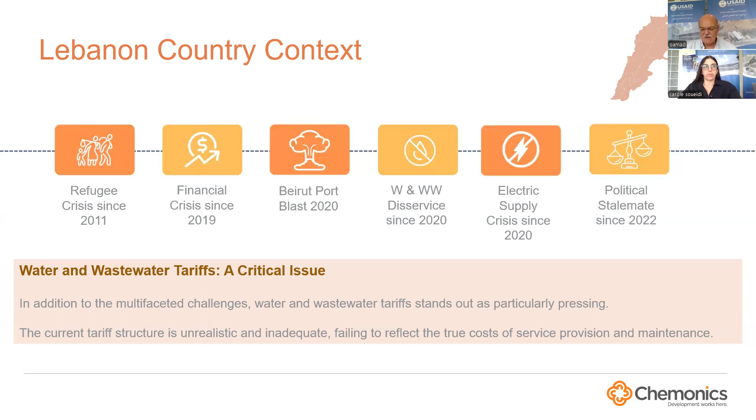So, in particular, the public water and wastewater service, which is our partner, is suffering tremendously, like all the other public agencies, with 95% deterioration and devaluation of the currency. They're unable to provide adequate service for their constituents, and the tariff collection also, of course, suffered tremendously because of the devaluation, with it being collected in local currency. And although they have in the law a mechanism to raise the tariffs every 3 months, they're cognizant of the poverty levels and the financial capabilities of the citizens, so they're not able to keep up with the expenditures.

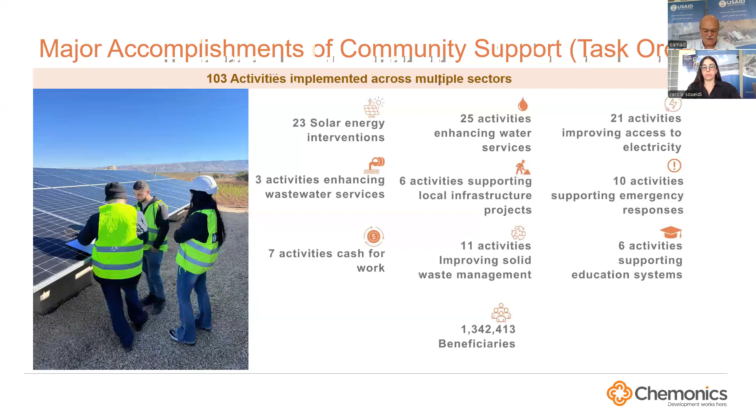So just briefly to go over the components of the community support program, Task Order 2, which is community support, has 103 projects distributed on many aspects of support to communities. And if you add all these that are listed, they're probably 112, but some of them are cross-cutting interventions, including solar energy, water service, improving access to electricity through generators, wastewater service through improving the collection system, infrastructure projects, waste management and recycling, and cash for work, particularly after the Beirut blast, where there was a lot of need to remove rubble and restore destroyed facilities.

So the third component, again, is the capacity building, and it supports all the activities under the IDIQ, Task Order 2, the one we just covered, and all the other ones that we've talked about. And it reached more than 3,000 people, trained them on new equipment, new facilities that were installed, new methods and best practices to do their work.

There is also support to the internships for university students to work within our program, the community support program, and many other USAID implementing partners' projects across Lebanon, and increasing public awareness and holding town hall meetings to introduce new equipment, new support to the communities, and also

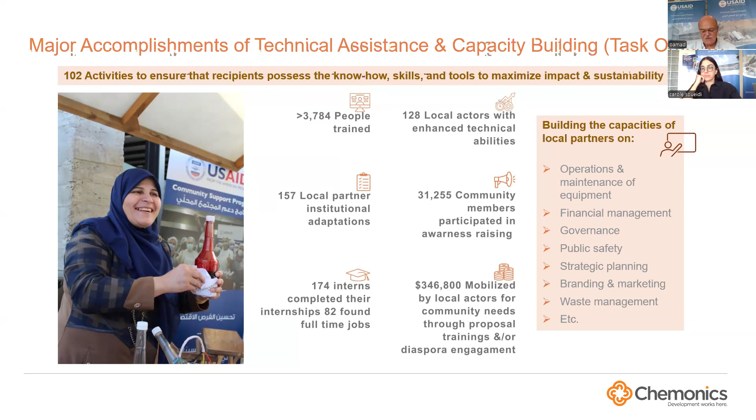developing a diaspora engagement mechanism. The Lebanese diaspora are, through history, spread out throughout the globe, and continue to have strong ties to the country, and eager to support their communities through assistance, financial and in kind. And our program tapped into this aspect and delivered $346,000 through that program.

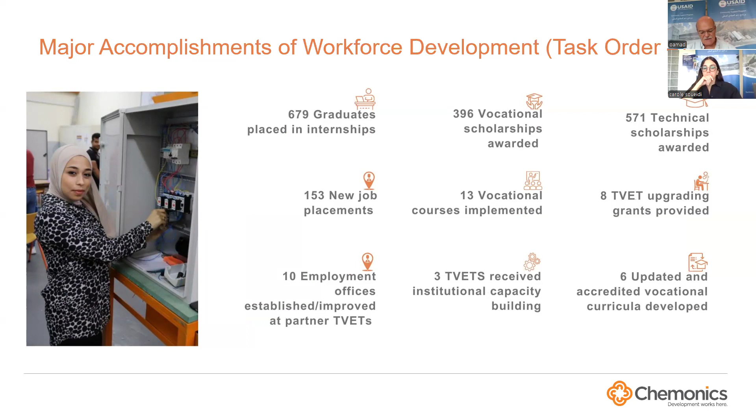And Task Order 4 is the TVET, the technical and vocational training, providing scholarships, developing curricula, improving TVET institutions, and supporting employment of graduates. So that was filling a gap, as I said, in the educational system.

Last but not least is our program, which is Task Order 5. Initially, it was awarded back in 2019, just before the financial crisis. And it was initially to develop 4 wastewater facilities, turn them over to the regional water establishments, our counterparts who would operate and maintain these facilities per their legal mandate, and to treat about 6,000 cubic meters of wastewater per day.

That scope, shortly after award in 2020, was expanded with additional funding to implement 6 facilities and treat 12,000 cubic meters per day, increasing the funding from 15 million to 22 million. However, witnessing the crippling effects of the country context on our partner, the regional water establishment, it was evident that these facilities could not be operated and maintained sustainably after we're done due to the financial crisis.

So through collaboration with USAID, the scope was adjusted in September 2022 to limit the implementation to the 3 already bid and awarded infrastructure projects, while diverting the remainder of the funds towards improving the sustainability and the financial viability of wastewater service to the extent possible, the three in particular that we're implementing, and to expand it to other facilities.

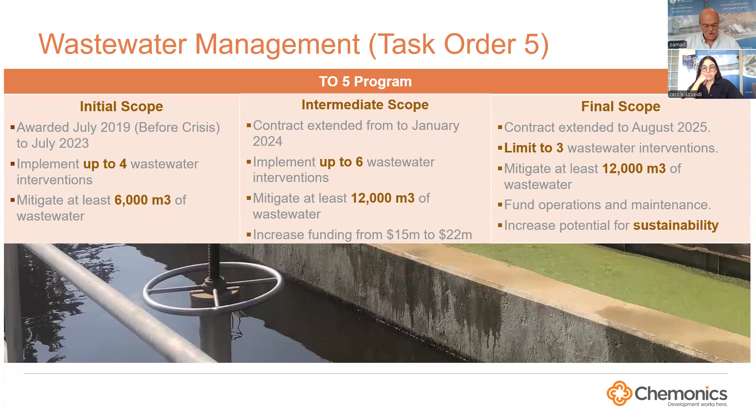So, with that, our team is composed of myself and 3 capable engineers. Ahmad Al-Khazin is the deputy director of the program, and Carole Soueidi, with me, and Mahmoud Farran are engineering managers that manage the construction, operation, and maintenance sustainability of the infrastructure we implement.

In addition to Nusayman Jaim, who's the program coordinator, and she's also tasked with another aspect of the Task Order 5 program, which is incentivizing the private sector to mitigate their industrial wastewater pollution, through providing them with a partial incentive rebate for installing industrial wastewater treatment.

So this is the performance criteria that we have to meet, which we've basically already met as we speak: mitigating 12,000 cubic meters per day, 1 municipal wastewater intervention, we have 3 of them, 1 industrial intervention, 2 of them already installed, as we'll see, and engaged with 7 others under consideration. And to have one of the interventions along the Litani River, which is the main river in Lebanon, and the case study that we'll share with you shortly is actually on the Litani River, that Carole will expand on.

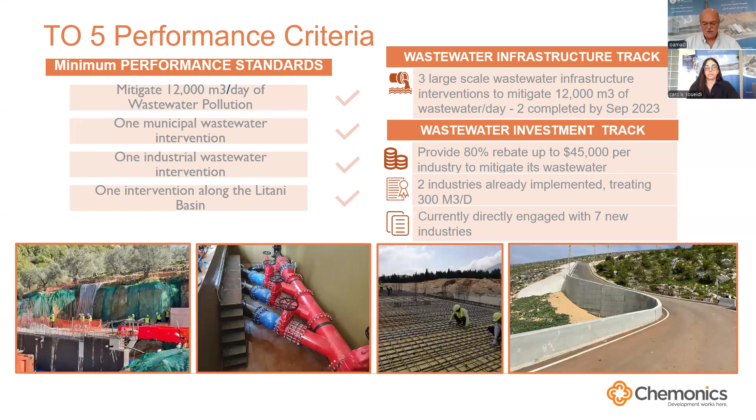And the investment track, we provide an 80% rebate up to $45,000 for any industry that's legal, that's licensed, and that installs wastewater equipment to treat its industrial discharge in compliance with the applicable laws. 2 of them already implemented, while we continue to work with 7 other industries.

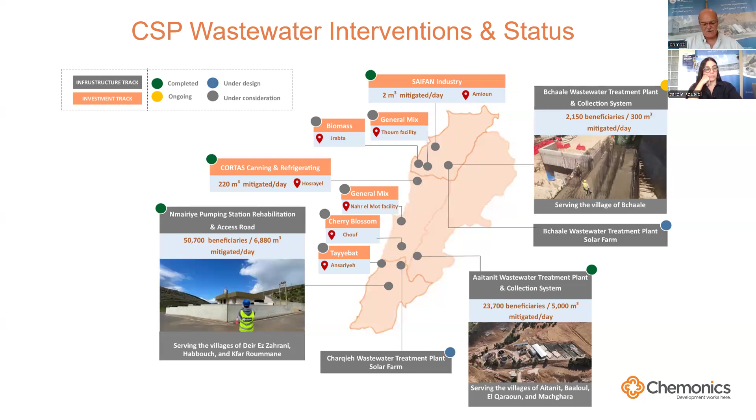With that, I'll turn it to Carole to talk about the Aaitanit wastewater treatment plant intervention in particular, and the implementation of the improvements we did there.

Thank you, Osama. Hi everyone. I'm Carole Soueidi, one of the two engineering managers on the wastewater management task order. I had the opportunity to serve as the project engineer on the Aaitanit wastewater treatment plant intervention.

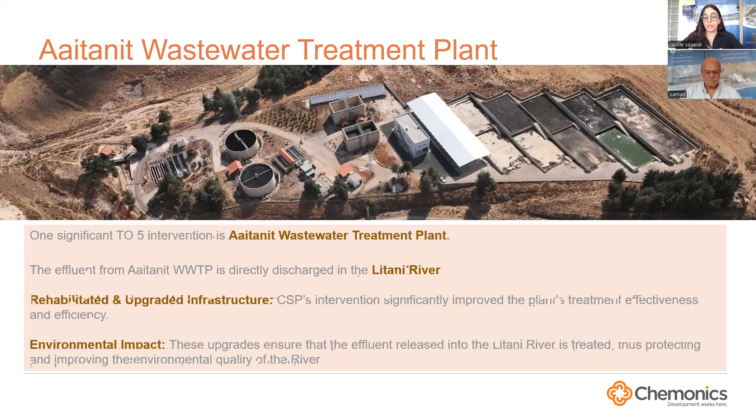To begin, the Aaitanit wastewater treatment plant is one of a handful of approximately 45 treatment plants in Lebanon that remains operational despite the crises and multifaceted challenges faced by the country. This plant plays a crucial role in enhancing environmental conditions for the local community, as it discharges directly into the Litani River. The Litani River is a main river in Lebanon with a major focus on efforts to clean it up due to its use in agriculture.

Why did we select the Aaitanit wastewater treatment plant under our program? It's due to many critical challenges. First, the plant operation was hindered by large accumulation of sludge. This sludge was only dried during summer, limiting the treatment capacity of the plant and causing pollution to the environment along with noxious odors. In addition, the supernatant, rich in ammonia, was overflowing into the Litani River, contributing significantly to its pollution.

Last but not least, many components on the solid and liquid processing line needed repair or replacement. So to tackle all of these issues, we first had to rehabilitate the solid and liquid processing line and upgrade the sludge management in the plant. Addressing these challenges was essential for the plant's efficient operation, and also to prevent pollution and reduce contamination in the Litani River.

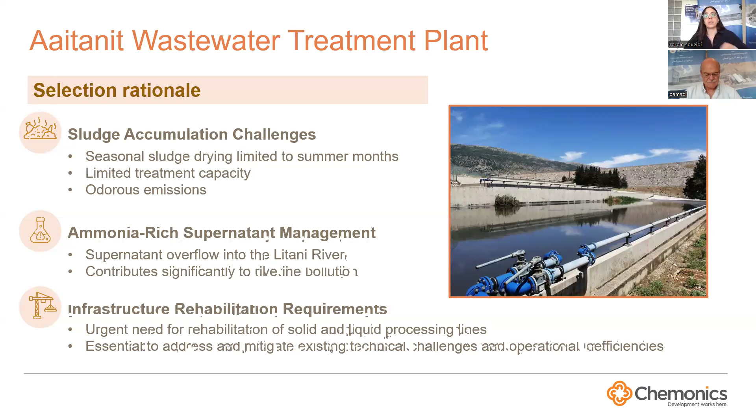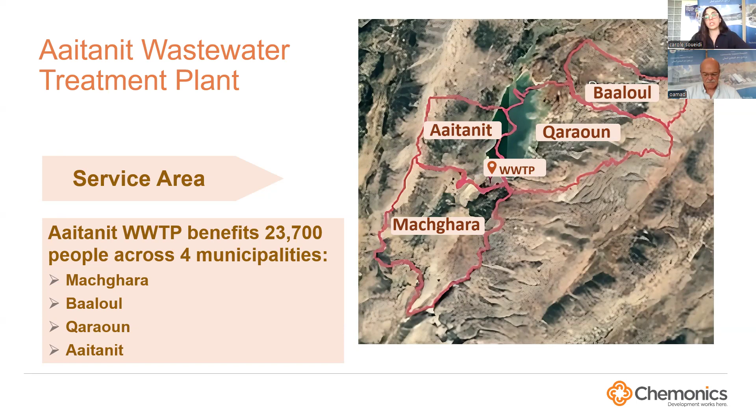As you can see from the map on the right, the wastewater treatment plant in Aaitanit is located directly downstream of the Qaraoun Lake, which is also used in agriculture. The Aaitanit treatment plant treats wastewater benefiting around 23,700 individuals across 4 municipalities: Mashghara, Ba'loul, and Aaitanit. As I mentioned before, this project played a crucial role in significantly reducing environmental pollution, which is essential for public health and ecological balance.

To give an overview of the historical development and key milestones of the project: first, this plant was built through a USAID fund back in 2009 to treat 5,000 cubic meters of wastewater per day. However, the Bekaa Water Establishment was unable to operate it, leading the Qaraoun Union, including the 4 benefited municipalities mentioned in the previous slide, to take over the operation of this plant.

In 2020, due to the deteriorating conditions faced by Lebanon and the lack of resources, this pushed us as CSP to select this project for rehabilitation and upgrade. In 2021, the design was completed, paving the way for construction to take place and be completed in September. We celebrated this key milestone with a ribbon cutting ceremony on September 14, 2023.

CSP also provided full training for the technicians of Bekaa Water Establishment and the union on troubleshooting and equipment repair. It was a comprehensive training, including equipment repair based on industry best practices and the highest safety standards. Currently, in Task Order 5, we are managing the operation and maintenance of this plant under a 1-year operation and maintenance contract, and we are also developing a public-public partnership to ensure the plant's sustainability. This will be discussed in detail later in this presentation.

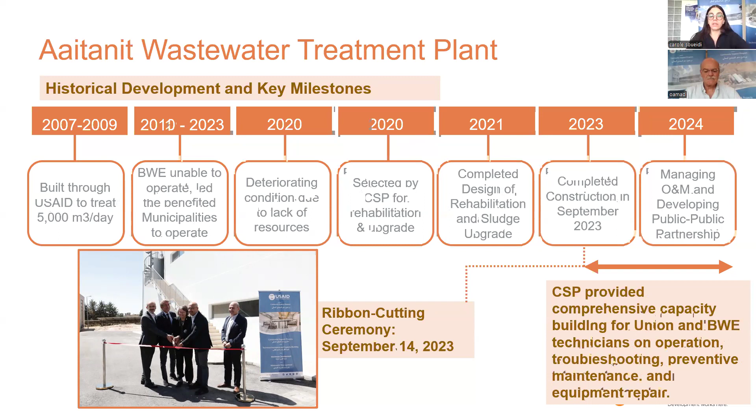So, to give you a brief description of what exactly we did at the plant, first, the USAID fund to rehabilitate and upgrade the sludge in this plant was approximately $1.5 million.

What we did is that we had several interventions at each of the treatment stages. We have repaired pumps at the trickling filter, replaced the pump at the influent station, also in the digesters. We also constructed a 2-story building to house 2 combined units for sludge thickening and dewatering, along with the polymer unit, the sludge tanks, and all the pumps and needed accessories.

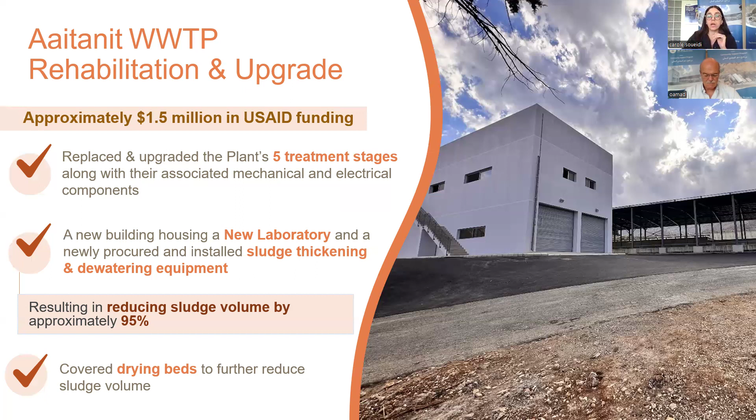We also housed a lab inside of this building so that all tests can be done in-house effectively. We also covered one of the 6 drying beds, and now that we have reduced sludge volume by 95%, all the sludge can fit under 1 drying bed, which we covered with a steel roof to further reduce the sludge volume.

This is a technical overview of the treatment process at the plant, which consists of both primary and secondary treatment. We made significant improvement at each of these stages, as we mentioned before.

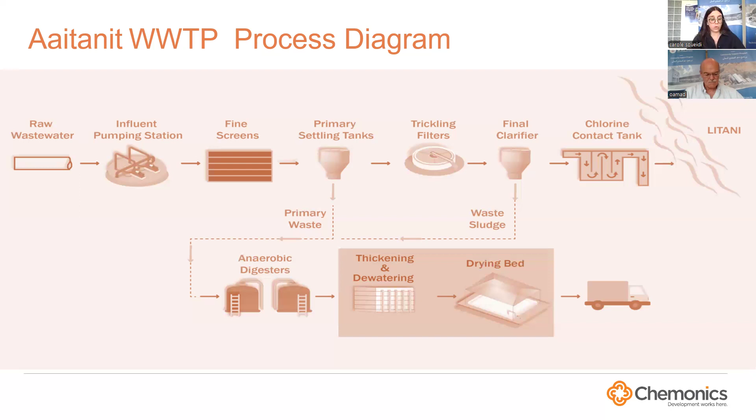The 2 highlighted components down in the sketch emphasize the 2 components that we added to the process. So our intervention here consisted of rehabilitating and repairing the underperforming components and adding the 2 highlighted components to the treatment process.

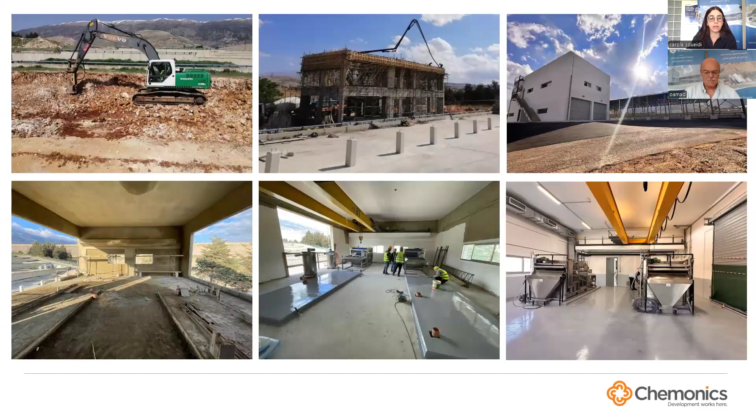We added several pictures here. In the first row, you can see the progress of work from excavation to finishing touches at the plant. In the second row, you can see the installation of the 2 combined units for the dewatering and thickening of the sludge. Here in the first row, you can see the steel structure roof we installed at one of the drying beds, and below, the new procured influent pumps.

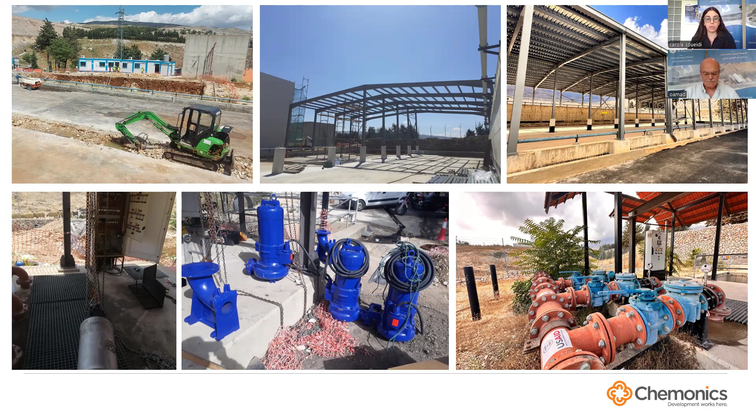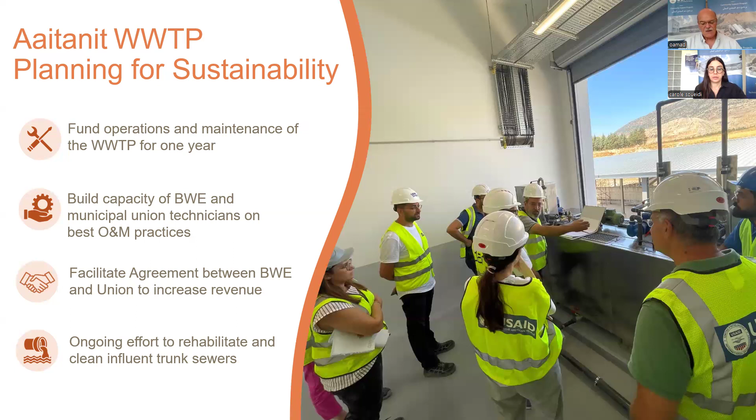So the agreement was - this is the history of operating and maintaining the facility. As we said briefly, it started in 2009 by the benefiting municipalities, and our intervention included the rehabilitation and upgrade and the capacity building of technicians from the Union of benefiting municipalities, and we engaged the water establishment as well with our capacity building. We're currently operating and maintaining the facility on our own and through a private operator.

The operator is mandated with involving and training, providing on-the-job training of the technicians from the Union of Benefiting Municipalities within his staff, to get them trained on best practices for operation and maintenance. And to ensure financial viability, we developed the public-public partnership between the benefiting municipalities and the water establishment, which we'll go over in the next slides.

So the regulations in Lebanon started back in 2000. Initially, before then, there were 21 utilities - small communities in the country, cities, unions of municipalities, of villages - that were created to provide water and wastewater service by their own communities. There were no clear roles and responsibilities, and regulations weren't yet fully developed.

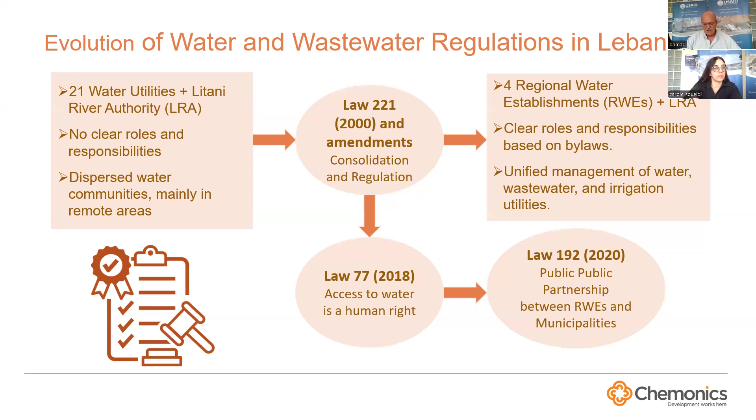The law was amended back in 2020 to allow for public-public partnership, to allow delegating the operation and maintenance of water and wastewater facilities to the local beneficiaries. Our example here is the first being done in the country for wastewater.

So the problem is lack of financial resources to sustain the equipment. This is particularly in light of the very low tariffs that were set even before the financial collapse. It was like $120 per year per hookup or per account, which is hardly enough to operate and maintain all the water and wastewater facilities in that region. And the other problem is the collection rate - it's very low. The hookup rates are also low.

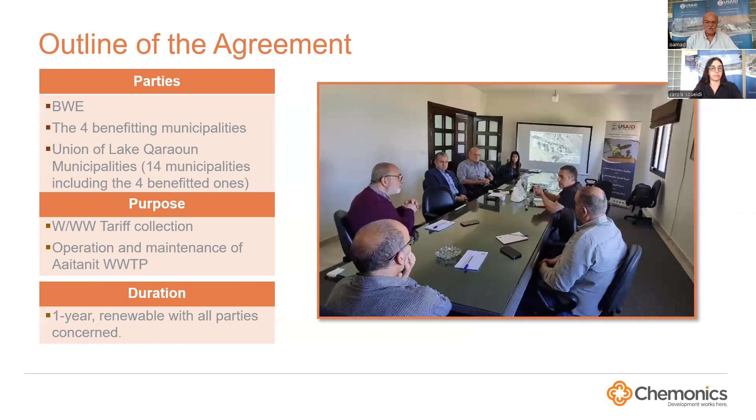The other villages or municipalities don't have financial obligation for this purpose. The purpose is to collect the tariffs from these 4 villages and operate the facilities. The agreement is drafted for 1 year, renewable unless any of the parties wants to stop it. This gives the water establishment the right and the mechanism, once it builds its capacity and financial situation, to take back these duties as the law initially was set for it to do.

So what's the obligation under the agreement for each party? The Bekaa Water Establishment has the duty to set the tariff, and they can adjust these tariffs every 3 months. But realistically, the tariff setting across the country is at the Prime Minister's or Council of Ministers level. The water establishments lobby and request increases, but that decision has to be endorsed at the highest level, primarily because of concern for the ability of citizens to pay under the current financial crisis in the country, and in recognition of their limited financial resources.

Under this agreement, the water establishment will provide the benefiting municipality with a list of their subscribers, and typically these lists are outdated.

They don't keep up with changed ownerships, increased stories on a certain building with more tenants, passing of old owners and new heirs, which the record does not update, and issue the bills to the new owners. They issue the water and wastewater bills.

Part of the mechanism for collecting the tariffs is to have incentives for the collectors. The more they collect, the more they get fees for collection. And the whole objective of this agreement is to dedicate a revenue stream for the operation and maintenance of the wastewater treatment plants.

The responsibilities of the 4 benefiting municipalities are to measure the water quantities and quality and report to Bekaa Water Establishment to ensure that the water quantities are billed according to the pumpage flow from the Bekaa Water Establishment. Update the subscription lists in their villages.

Now, these villages have very precise records of property rights and property taxes, so they can update the subscription lists per the updated property tax records that they have, and hence correct the subscription lists for the Bekaa Water Establishment with the current situation in their villages, and perform the collection of the tariff on behalf of the Bekaa Water Establishment.

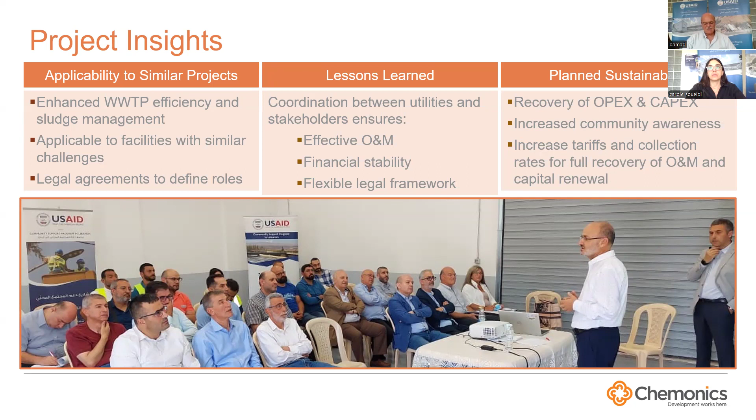The plans for sustainability: the revenue collected will be adequate to support the operation and to build up for capital improvements in the future. The community will be more aware of the financial obligation and the performance of the facility to protect their environment, and the tariff collection rates and tariff settings will definitely need to continue to be improved for the water sector in Lebanon to achieve financial viability in the long run.

Solar energy in Lebanon is abundant, and we took advantage of that to sustain the facilities that we implement, and that's being done across the country. The electric supply in the country is crucial for all aspects of life here, because it's extremely difficult and expensive to maintain water and wastewater facilities unless you have a reliable and affordable power supply, while the regional water establishments continue to evolve and develop their financial and technical skills to assume their full mandated responsibility.

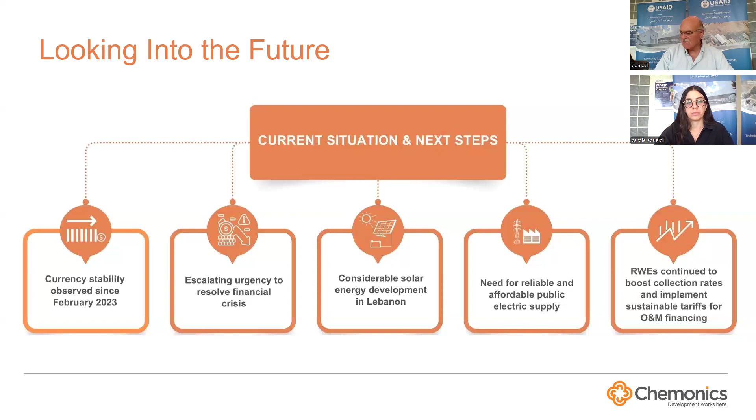With that, Carole would like to share with you a video on Aaitanit in particular to show you the improvement that we did and the project overall. Carole?